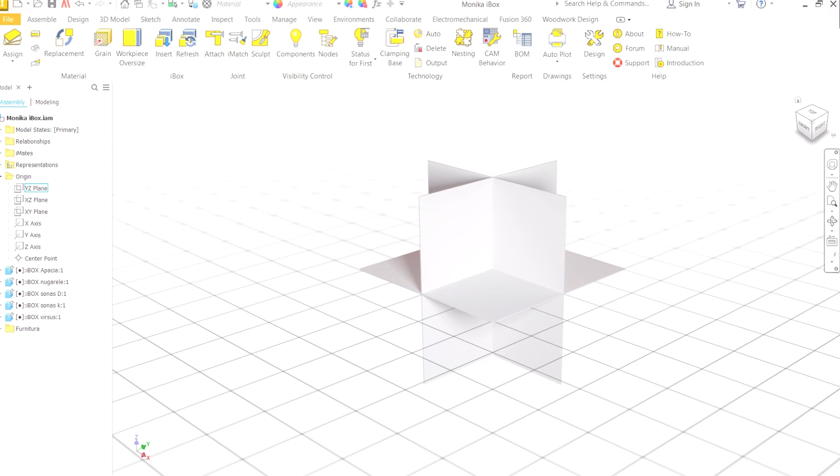The furniture design market is gaining momentum. Design trends are changing fast. New materials, forms, and hardware solutions demand creativity, flexibility, and speed from interior creators. Woodwork for Inventor is a solution that helps furniture design companies stay on top and walk hand in hand with this evolution. Based on Autodesk Inventor, Woodwork for Inventor is built to meet every designer's needs and to strengthen design departments. By automating routine tasks, our software eliminates human errors and shortens time to design.

Woodwork for Inventor is successfully used by more than 600 companies worldwide. There are two main reasons for this success: the technologies are developed one step ahead, based on 30 years of experience in the furniture market, and a wide network of partners that ensures seamless implementation, integration, and support. We have a proven methodology for solving the designer bottleneck, avoiding painful sudden changes, large drops in productivity, and preserving the existing workforce. Our unique know-how allows us to solve the most complex problems, and the API gives us the opportunity to adapt Woodwork for Inventor to any needs. We guide our users step by step through the entire integration process, participating in all stages and providing all the necessary information to achieve your goals.

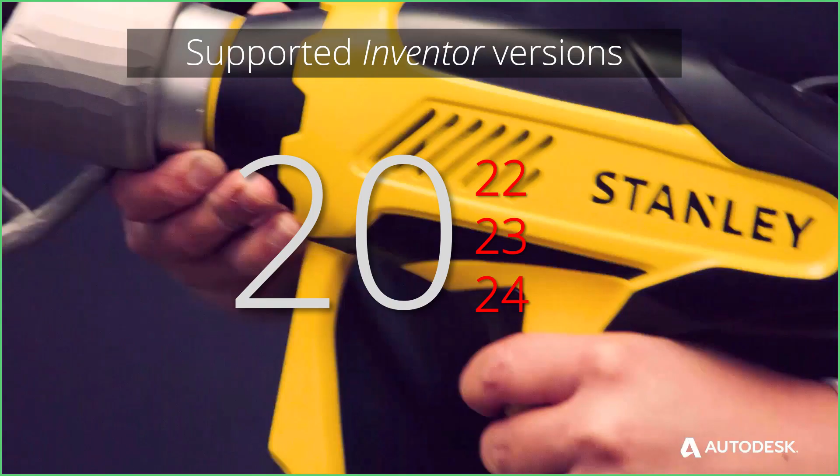Let's begin from supported Autodesk Inventor versions. Of course, we support the newest Autodesk Inventor version 2024, as well as, in the previous cases, two more versions below the current one, which are 2023 and 2022. So that's a good opportunity for upgrade.

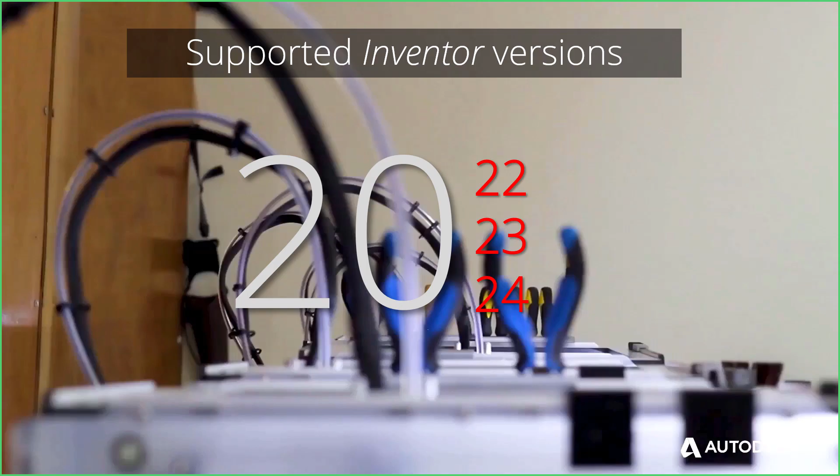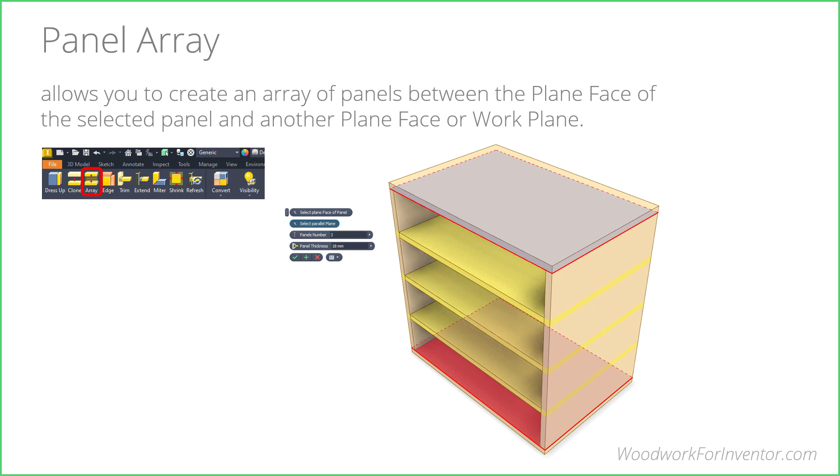Now let's speak about the new features in the different areas of Woodwork, starting with the design environment. In the design department, let's start from the skeleton. We have a new feature called Panel Array, which allows you to create an array of panels, as the name suggests, between two selected faces. You can choose two faces and define how many panels you would like to get. There are different scenarios for that kind of thing.

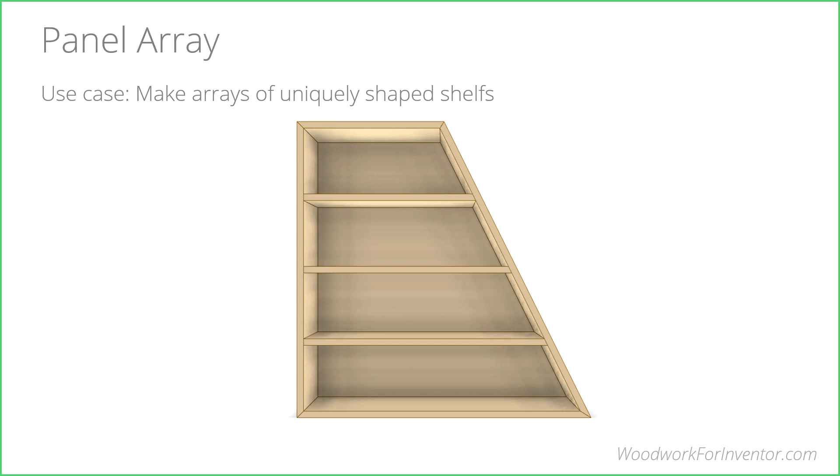For instance, you can make an array of uniquely shaped shelves, like in this example. In order to do this manually, you need to spend some time, but with this new feature, it's a rapid prototyping technology. So let's take a look at how it goes. First, we begin from just a regular sketch. We can design a general shape of this trapeze, define the depth, and then let's take a look at how this new function works.

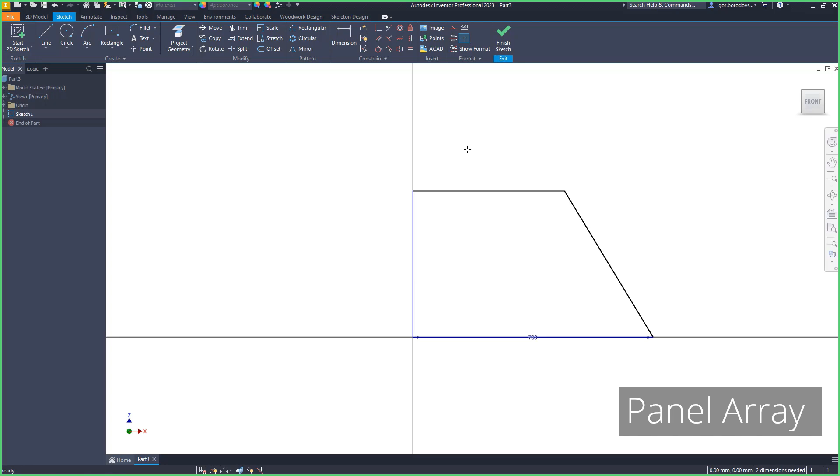Normally we start from a concept, define constraints, then add some dimensions, and just a few minutes after that, that's what we have. So let's set the depth like this.

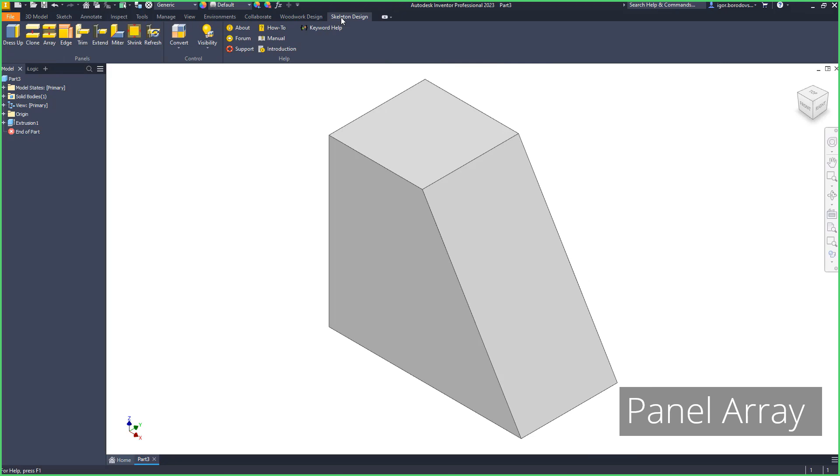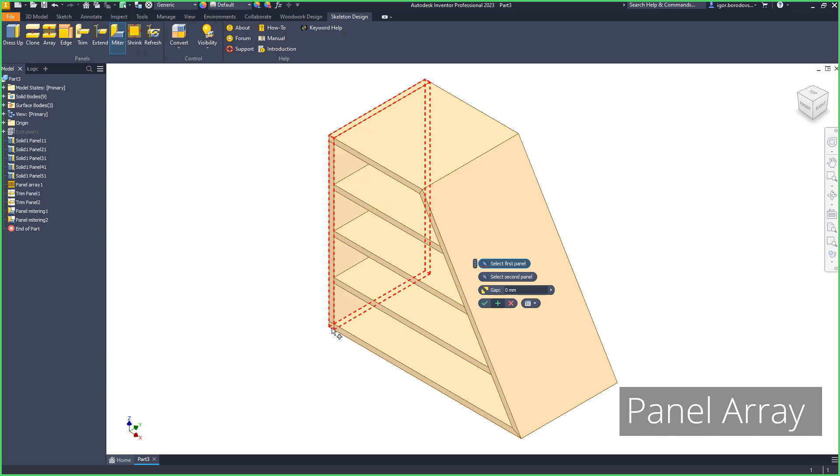Set the panels all around, except the front. Now we can hide some of the volumes that we don't need and use this new panel array feature. As you can see, some of the panels are now overlapping, but we can use the trim function to quickly trim the extending areas, and then use miter to join the panels at the correct angle, and that's it. As you can see, after a few minutes, that's the model we got.

Very nice. Now let's speak about the modified trim command, the command used to actually cut intersecting panels. Now you can specify the gaps between the sides or top and bottom of the selected panel. Moreover, there is a split option which allows you to split a panel in two.

Let's say we have some section in the middle of the furniture and a shelf which goes all the way from left to right. So we can use this divider in the middle to get two shelves instead of one.

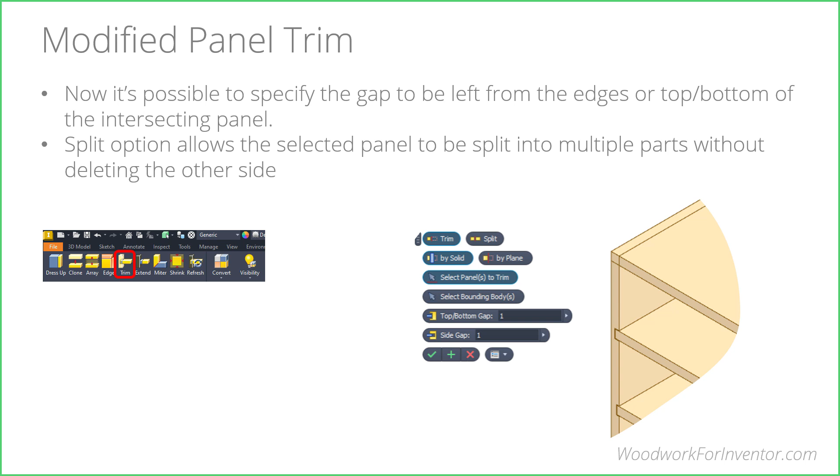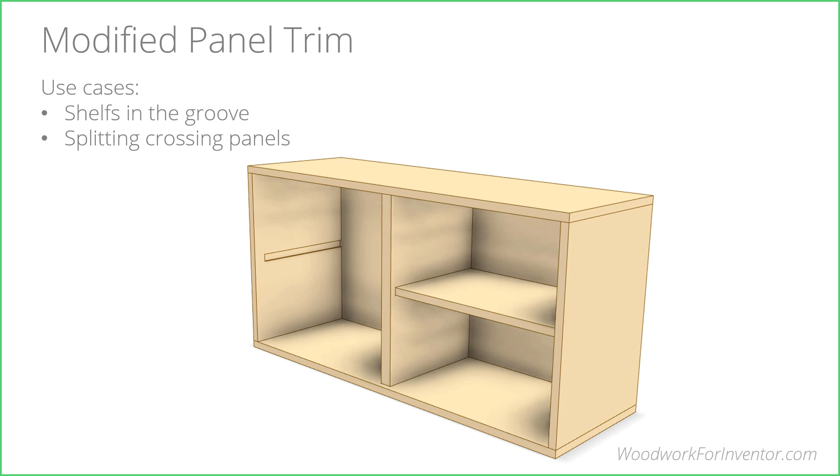So here you can see some examples of what I meant. We have just a case with a vertical divider, and we got a shelf split into two pieces, two halves. Okay, let's take a look at how it happens in real life.

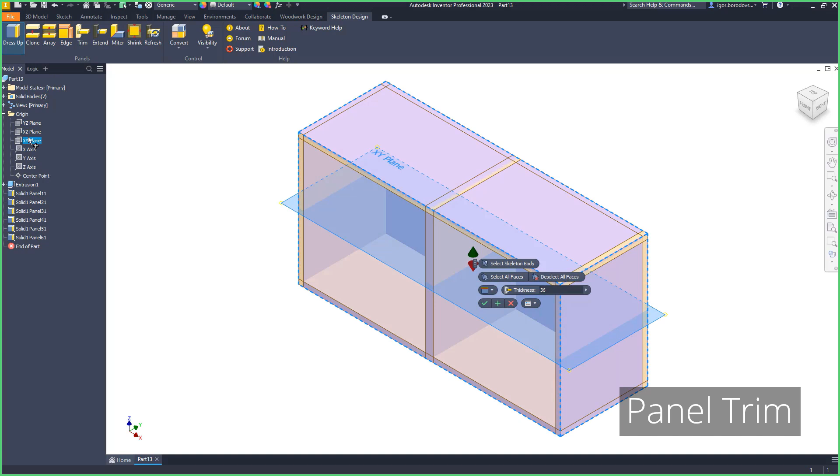As usual, everything starts from the concept. I'll speed up this step a bit since there's nothing interesting in drawing the box. Then we can apply the panels all around, using the plane as a reference, so we can make the panel at the intersection between the plane and the skeleton body.

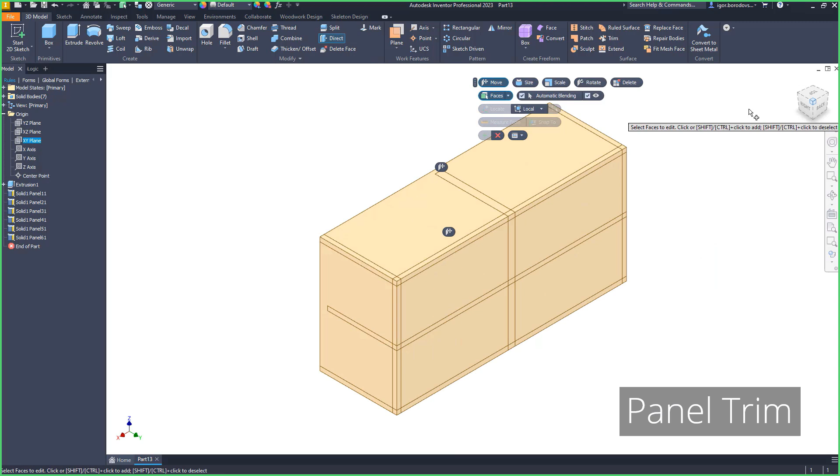Now I can use the direct tool to quickly set some offset from the front. That's it. But as you can see, everything is overlapping now - all the panels are intersecting, so let's deal with that situation.

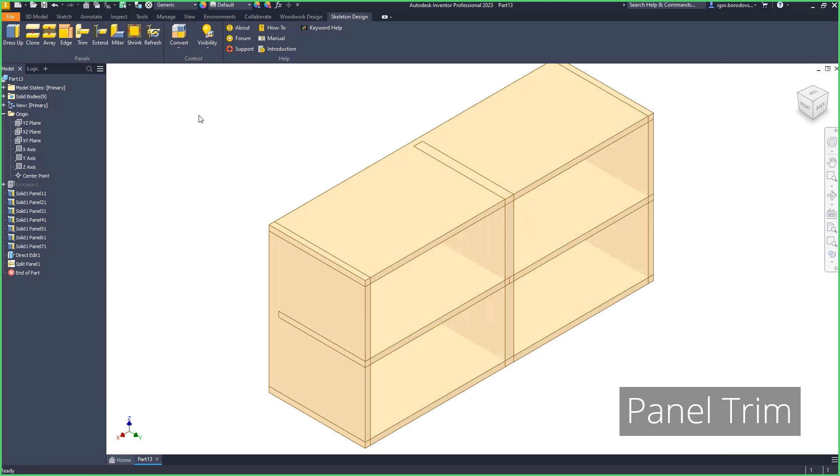I hide the back plate, and now I can use the split command using the plane as a split tool. So that's the work plane, and I got two shelves split by the plane. They are overlapping right now, so let's take a look at what we can do next.

I can trim this divider by the plane again, like this, but not in two equal pieces - instead using a gap value, which can be negative. So you can see this panel going inside by a certain value, like 9 millimeters.

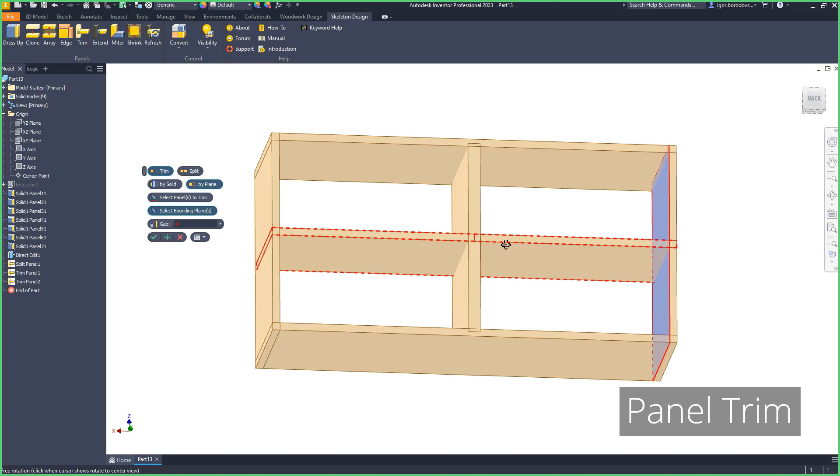We can do the same with the sides, like this, and now those shelves go inside of the vertical panels by a certain value, okay, like this. For now the panels are still overlapping, but we'll deal with that a bit later.

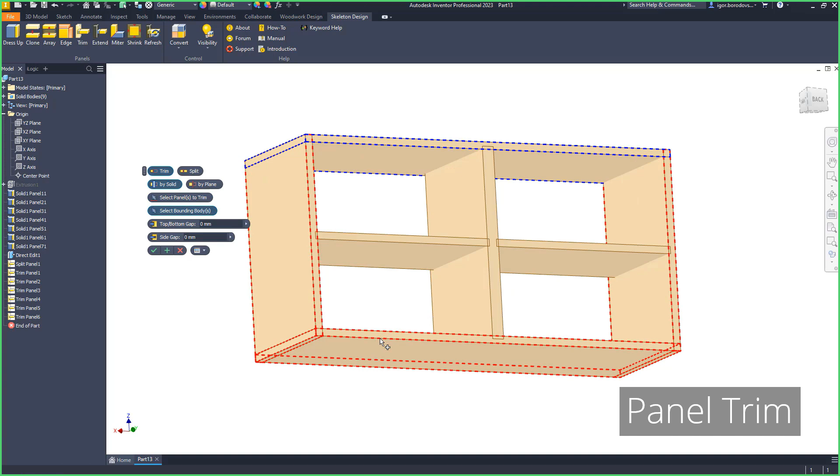Now I can use trim by solid to define the correct join between the top and the side panels, like this, as we normally do. Now let's deal with the shelves and the side.

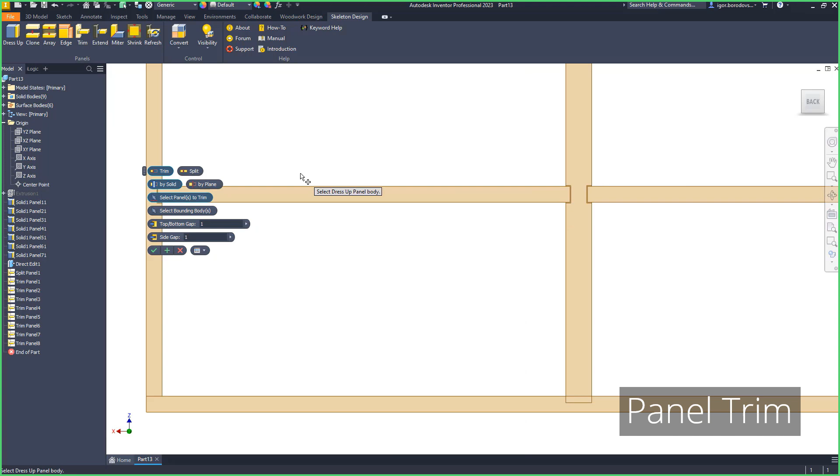I can select vertical panels as the panels to trim, now bounding elements, and here you can see that I can set the gap, like 1 millimeter all around, like this.

Okay, and the same with this vertical divider. So let's choose panels that need to be trimmed, bounding object, set the gaps, and that's it.

And so now we have the front view. We just flip the furniture, and that's the result - we have nice grooves with some gap.

Of course, this gap might be too big in this example, but just to have a clear vision of what happens, I used a slightly bigger distance. As you can see, that's quite complex geometry done in just a few minutes.

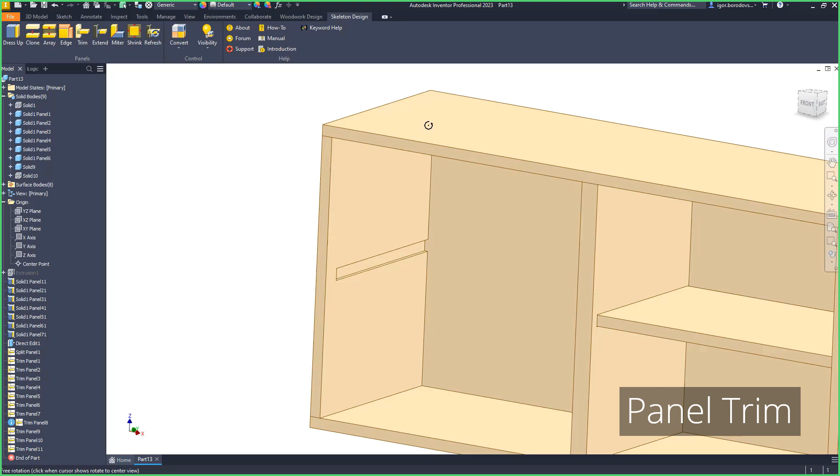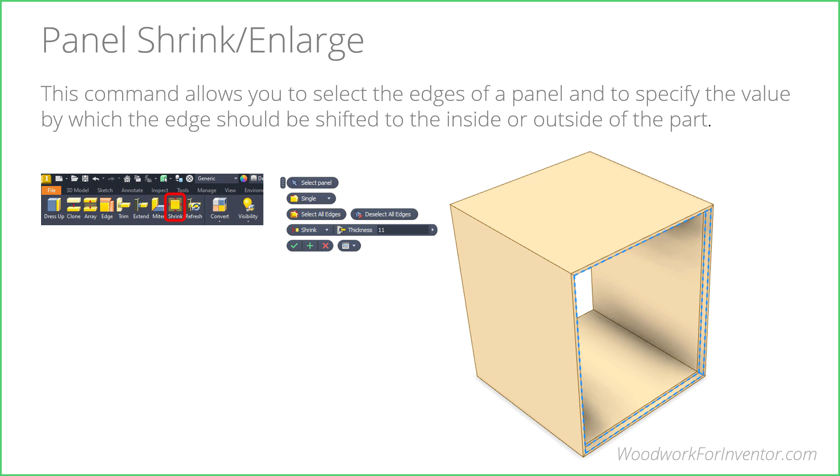Now let's look at another feature: the panel shrink option, which allows you to define different panel offsets. Normally you'd need to make a sketch to shrink the panel and do an extrusion with the intersect option, but in this case you can do it in a single command. The options allow you to select different edges and define different distances to shrink or extend the panel.

What are the typical usage scenarios, like back panels or adjustable shelves? In this example, I had the shelf inserted inside the volume of the box, and then I used the shrink to ensure the front offset as well as the side offsets and the back offset.

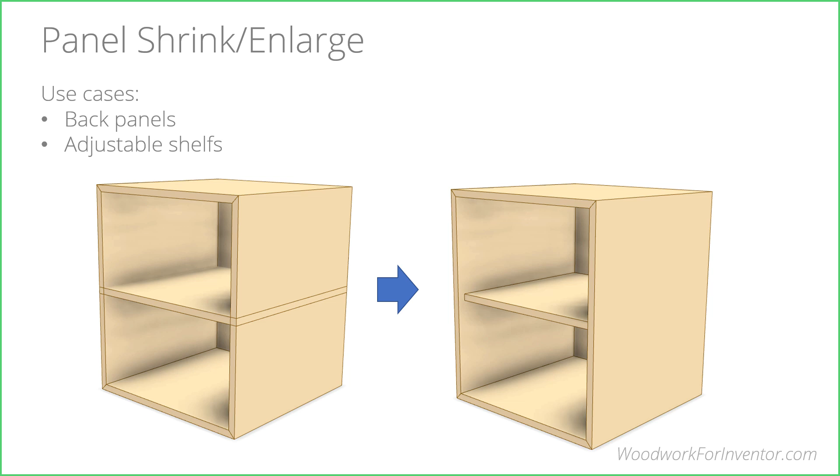Okay, so let's take a look at how it goes. I will not show the initial workflow - let's imagine that we already have some box with the panels.

Then we can just do the miter, and let's take a look at the back panel. I can define the shrink distance like this, and now this panel became smaller.

Now I can use a trim function in order to trim the panels which surround this back plate. And that's it - you can see we have a nice groove, just a few clicks.

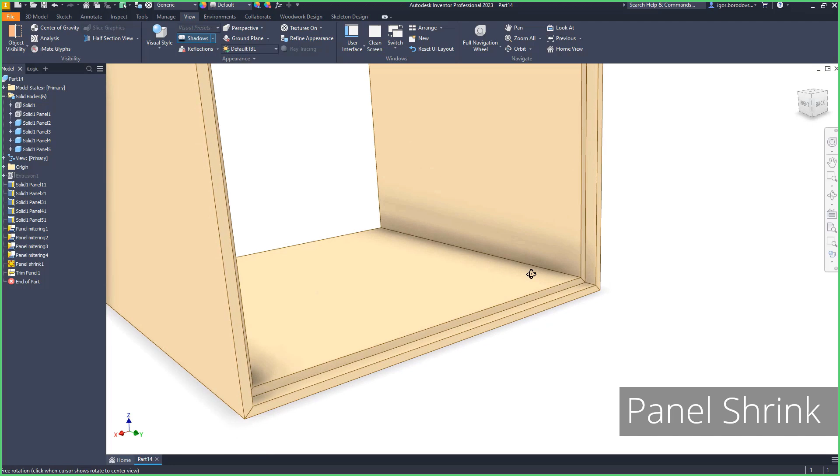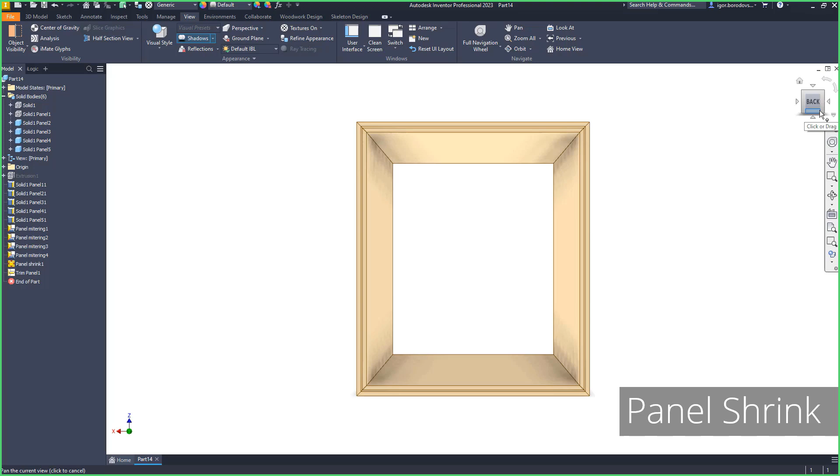Now let's take a look at the Edge Dress Up command, which allows you to create solid bodies around the panel edges.

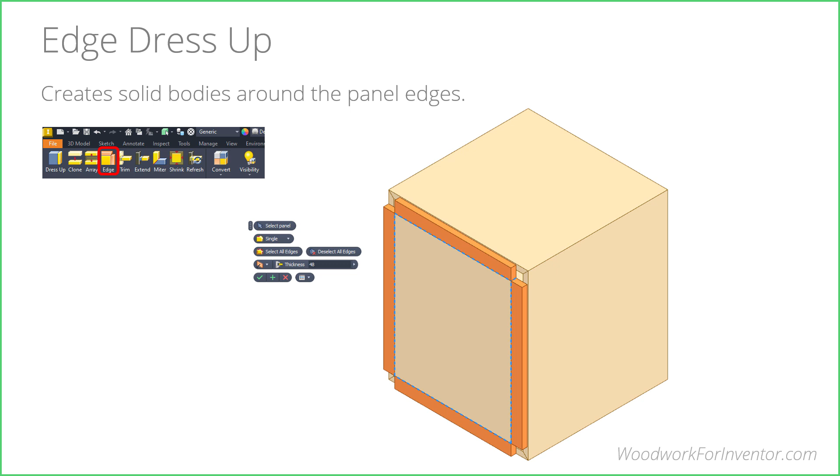Okay, so you can see that those orange panels are solid bodies generated on top of the existing door panel, which of course can be done using the shrink option. First you make the door, then you shrink it down, and then you apply solid bodies around to make it like an inside door, like this type of door. Yeah, there might be different use cases.

For instance, you can use a framing option. You can just have multiple steps in order to get multiple frames all around. Let's take a look at how it goes.

But before that, just one more word about the miter command. As you saw, this command allows you to get a cut between the angle. There was nothing new here, but there's a new feature which allows you to extend the panels before a mitering operation. So you could only do a miter if those panels were overlapping in the previous version. Now it's not necessary—we can do a miter in any case. Even if those panels are not overlapping, we can automatically extend them and then do the miter operation. Let's take a look at how it happens, okay?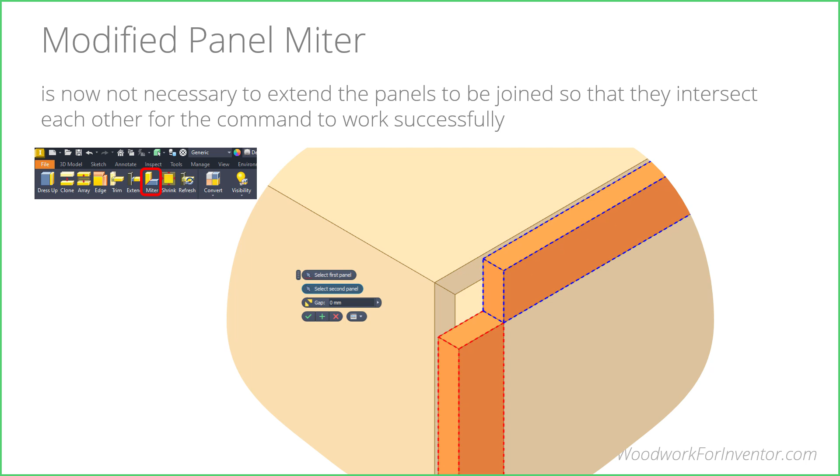The typical scenario of this case can be different kinds of frames, solid wood doors, etc. So, the real case—let's say that's our initial situation, that's the panels. And let's take a look at what we can do.

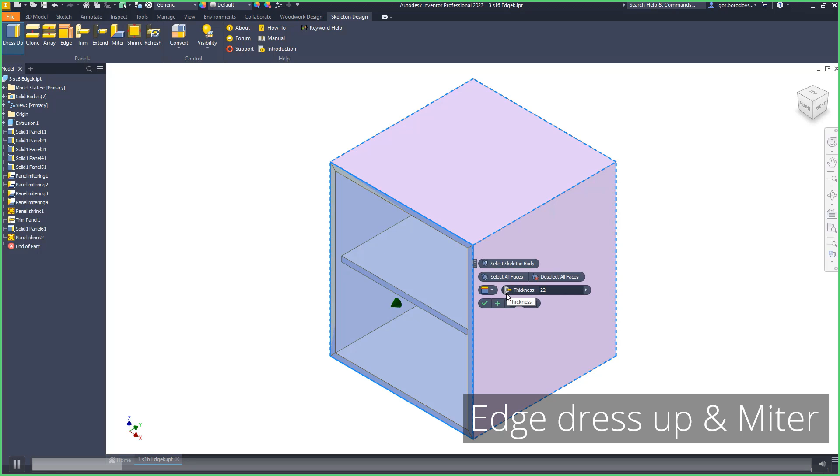Okay, so let's make the dress-up operation, define the thickness of the door. That's it. Now I can use the direct tool to move the solid body of the door a bit aside, because as you remember, there might be a gap of 2 mils between the body and the door.

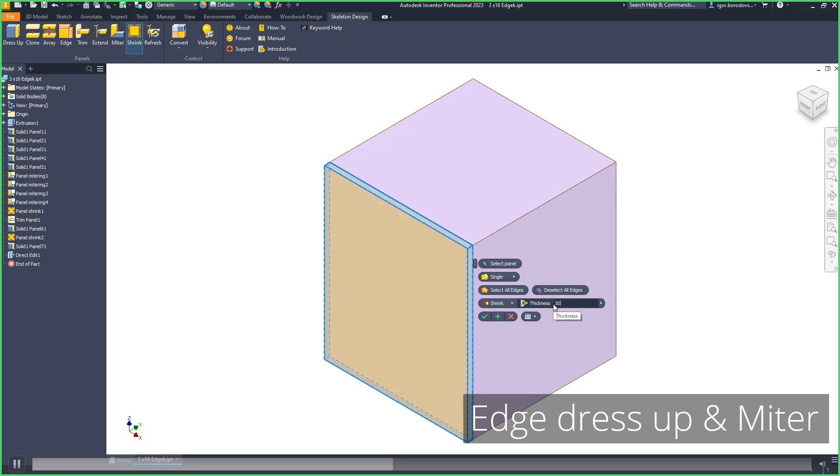Now I can use the shrink command, the one we already saw. I can select all the edges, define the offset value—let's take it bigger because we want to apply solid pieces all around. Now I can use the edge generation command and define a bit smaller value because I need to have side gaps. Imagine that we can have multiple cabinets standing side by side, so I want to ensure the clearance.

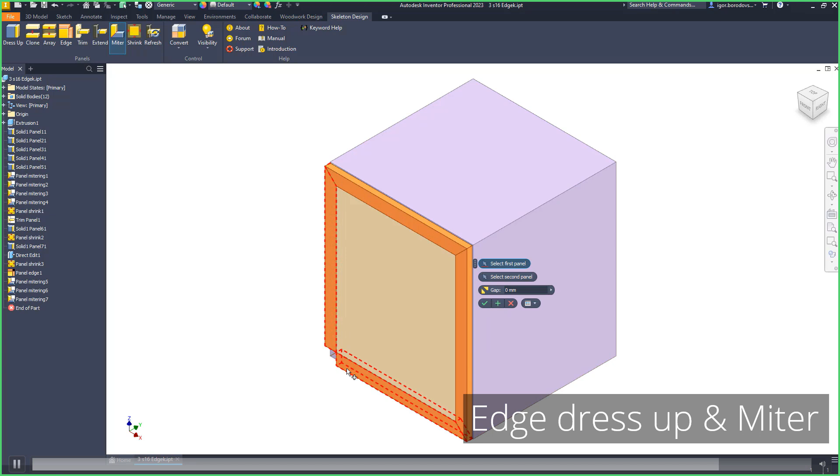And then let's use the miter, which allows you to automatically extend the panels and actually make the miter. As you can see, there's the gap option that can be used for different purposes. Okay, so that's basically it—as you can see, we got the framing.

Okay, now let's take a look at the interface. We have some new interface workflows. For instance, when you do body conversion and visibility control, you can actually do this in a drop-down menu. You can say what you'd like to do with the object—hide all the skeletons or maybe all the panels—in just a few clicks. You don't need to actually set the type and so on. You can select the item from the drop-down, and the operation menu will automatically inherit the option you selected, and you just need to pick the object that you want to convert or hide.

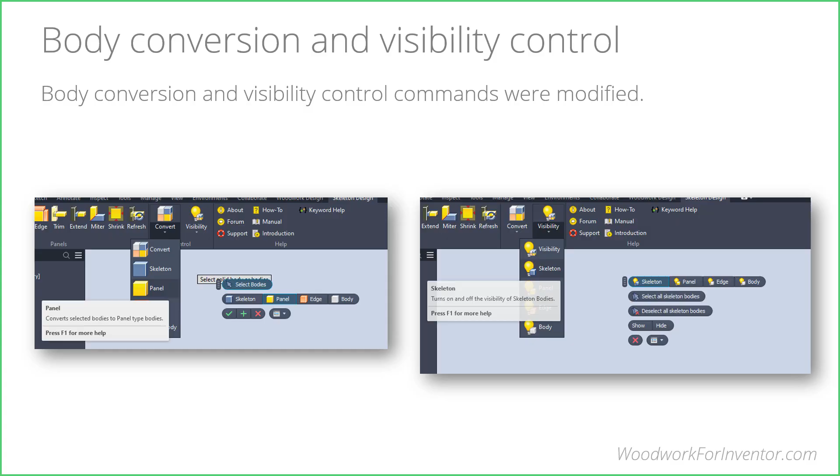Now let's speak about the hardware. That's one of the main improvements.

First of all, we built a new smart hardware mechanism, and later I'll explain what this means. During the insertion of the hardware, we need to recognize if it's old hardware or the new one. The smart hardware recognition mechanism automatically recognizes hardware made in this new way and applies certain rules to make the join correctly.

So from the user's perspective, nothing changes in terms of usage of legacy hardware, but when you use the new one, it works a little bit differently. We'll see how it performs, but it's very clear—there's no user interaction needed. You just pick the hardware you want to use, and the system automatically recognizes if it's done in the old way or the new fashion, and applies the appropriate workflow to insert it.

So now let's take a look at what this new smart hardware actually is. In simple words, it's a set of components made with some logic inside, and it controls how those components need to be connected.

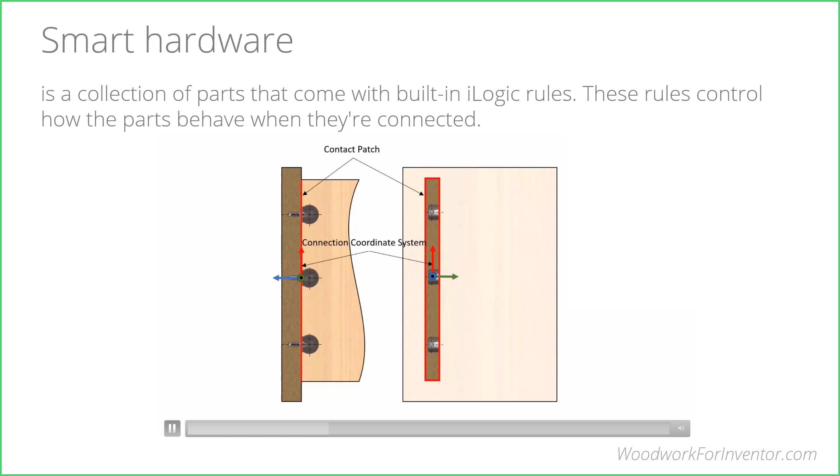In the background, what we do is calculate the contact patch, so we can estimate the surface area. In the logic of the hardware item, we can define the offset. So we can say the first component should be set at some distance from the top, the last one at some distance from the bottom, and there should be one more in the middle. Using this logic, we can program our set of hardware items, build some logic inside, and actually place multiple instances of the hardware in the correct places in a very short time. Later we will see how this happens.

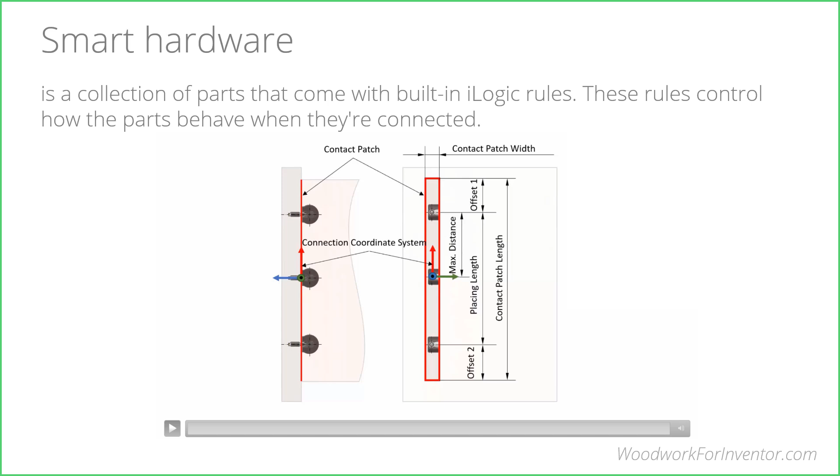On top of that, hardware items can have macros. This isn't a completely new feature, but just to refresh your knowledge, some hardware requires multiple steps in order to be positioned. Say, for instance, you do a milling operation, then drilling, maybe drilling from the other side. This requires multiple steps done in a certain order, with certain tools, to make a void for certain hardware. So you can make macros, which are not limited to 2.5 axes—it can use however many axes you'd like. What we do is just pass the coordinates in a macro with the actual code of the program, running some application at a certain position from the edge.

So how does this relate to the new smart hardware? Those hardware elements you design can also have macros inside. Not only do you place multiple elements in a single operation very quickly, with no more work planes needed—everything can be guided by embedded logic—but also those hardware items can be quite complex, with multiple steps needed for actually placing the elements.

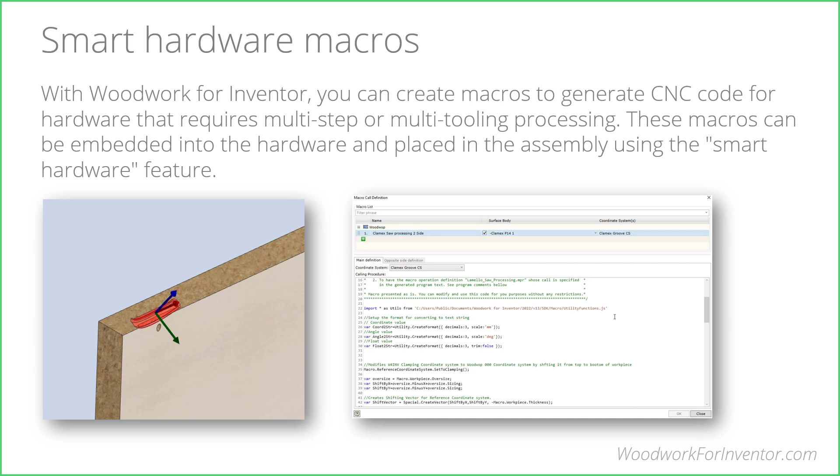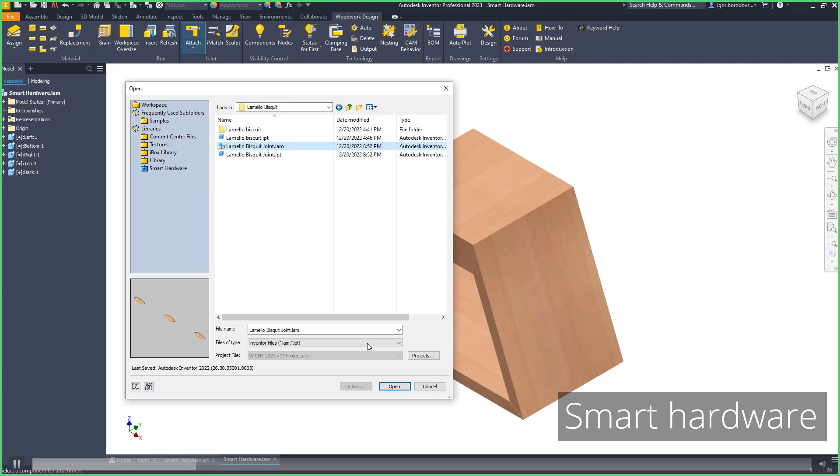Okay, so now let's finally take a look at this command in a real case. You can see it's quite an unusual shape. We will place the hardware elements using the regular attach command. So now we navigate to the new smart hardware folder and choose the Lamello joint, and what I need to do is just select the items that need to be connected.

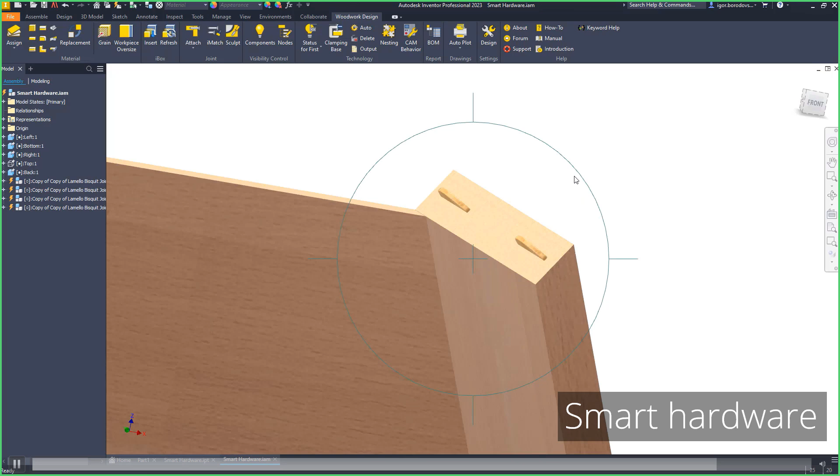Now the calculation happens in the background—we actually calculate the intersection area, and we decide how many of the lamellas must be inserted. That's the magic, that's the trick. As you can see, there's no need to make a work plane, no need to make additional geometry. Moreover, you can embed different scenarios inside your hardware set, and just work it out with different joint types and so on.

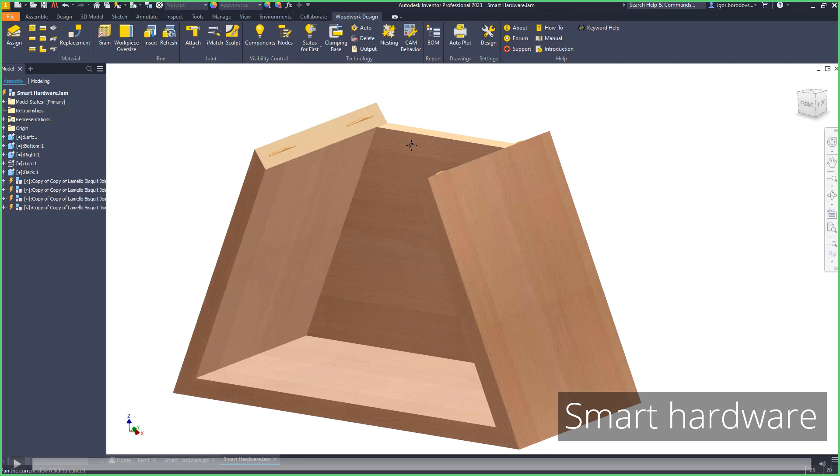Okay, now let's move to the BOM, the bill of materials. We included some keywords, like for instance CoverWorkpiece.X.order, which allows you to define the order in which the cover will be applied. This is useful when you work with expensive materials, or maybe not a regular edge band but thin metal plates and so on—in this case, the order can be critical. So Woodwork allows you to get this order.

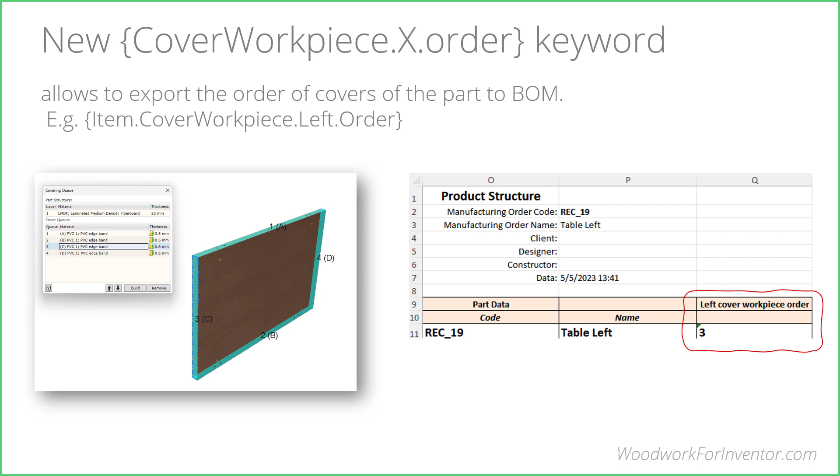And speaking about keywords, there are multiple keywords in the new version—some of them just reword legacy keywords, some are new. That's why we have a keyword help, which allows you to get the definition of the keyword in an easy to understand form, with an example and the format definition. You can use those keywords to shape the output data, so for instance you can make the bill of material tailored to your needs.

So the next topic is materials. In the material command, the first thing you'll see is the newly refined material assignment window, and there's probably no need to explain the difference. But if you didn't notice, there are no more drop-downs—in most cases there's some drop-down for a certain material cover option, but nonetheless there are no drop-downs, which means there are way less clicks. You can just directly say what type of material you'd like to assign and what the option of this material assignment is. On top of that, you can also see the thickness of the cover material you are applying.

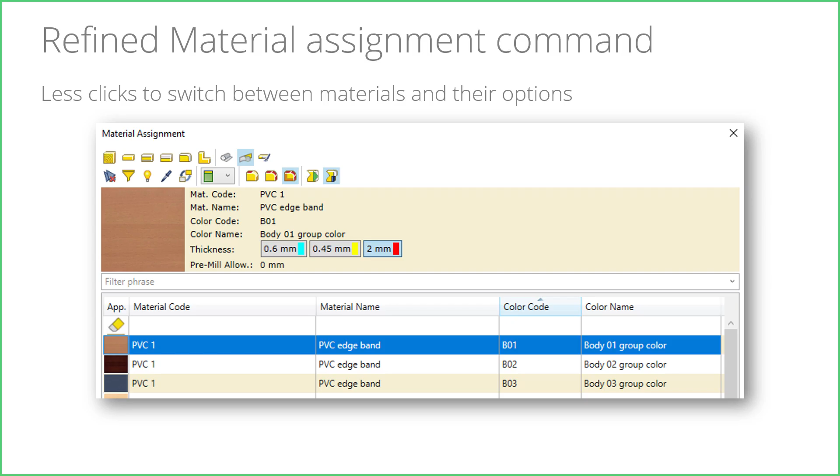Okay, let's move to the next topic—this will be CNC.

Okay, so one of the new features is an option to export CAM technology into BOM.

So how it goes: in the first step, you prepare a Woodwork technology as you normally do in a regular case. Then in the Woodwork BOM, you can actually use a certain XML template for a BOM export, and this BOM template can get the technology of Woodwork. Let's take a look at what the BOM does.

It generates some output file, like a text file. So what we do is request the Woodwork BOM to take the technology from Woodwork parts and provide some document, and this document can be in XML format. This file is built from CNC technologies within the parts of Woodwork, and this XML document can be imported into supported apps. That's how it goes.

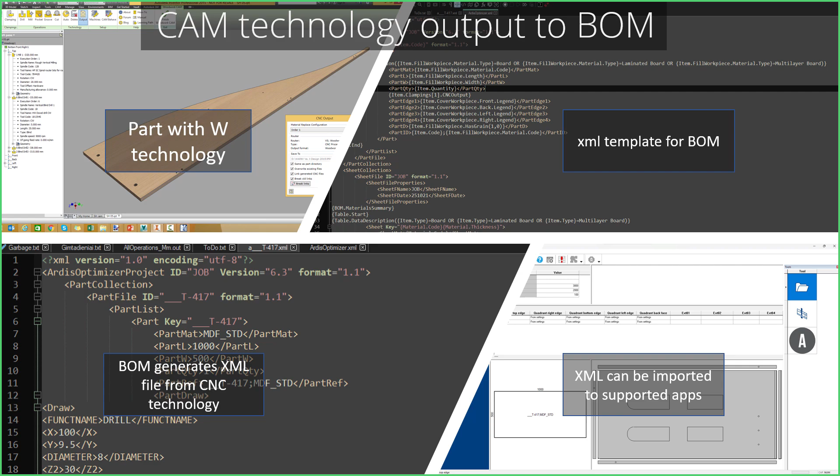Okay, so there are minor post-processor improvements under the hood. It's quite hard to explain what was actually done here and there in different post-processors. But there is one important thing: there is an option which allows you to build your own custom post-processor. We'll speak about this a little bit further.

Okay, so when we do CNC, there is an option near the mill command that allows you to chip the area. Why do we actually need to make the chip during the mill? In most cases, when you do a milling of some contour, let's say a cutout for a kitchen sink, you just go around the contour and the remaining piece just falls out onto the machine. Depending on the structure of the machine, this can be potentially dangerous.

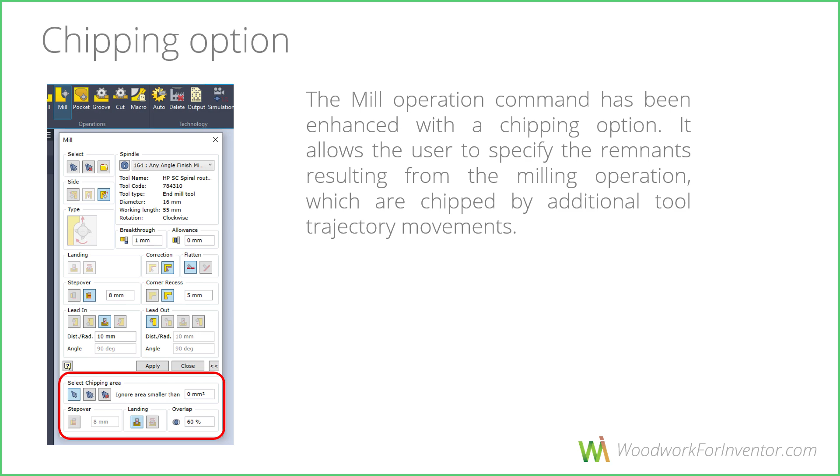So say if you have vertically mounted plates or panels, it's not good if this big piece of panel just falls somewhere. So what you can do is chip this panel. You can go around the contour starting from the center, actually turning the panel into dust. Let's take a look at how it happens in a real case.

So that's the milling operation. And that was the option to actually chip the panel.

As you can see now, the router moves the milling tool starting from the center and moving towards the perimeter. In such a way, you just basically get a lot of chopped wood, and that's it. You have no damage to the vertical machine, or maybe some certain kind of machines that don't like when a big piece of wood just falls off somewhere inside the machine.

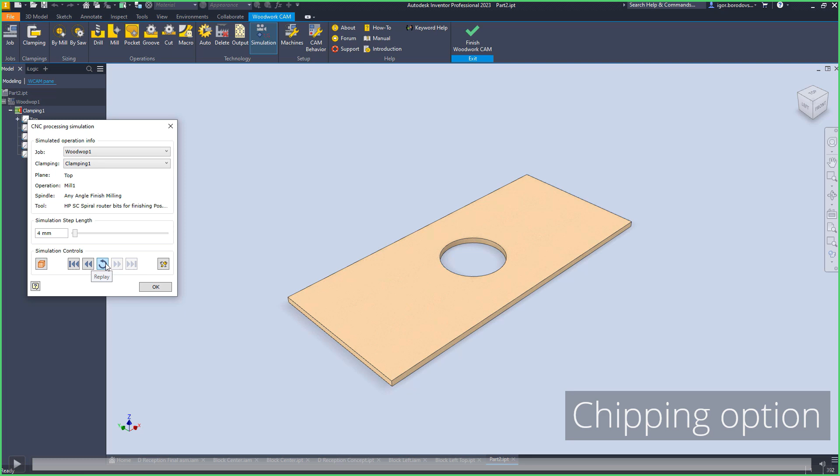Okay, so now let's take a look at the nesting, the optimal layout. In some cases you need to actually simulate what happens in the nesting, and we got you covered in this version. So now you can run the processing simulation on the nesting.

The nesting is not the same as just a regular CNC, because there are certain rules and restrictions that apply. For instance, you cannot access the side operations; you basically do only the top operations. And since you do this with the rotary tool, which cannot make sharp internal angles in some cases, you need to check what will actually happen during the nesting. Maybe you need further processing on the CNC machine, maybe not.

As you can see, there is a nesting environment, and you can use right-click in order to simulate the processing - that's the last option in this drop-down. You can do this on the sheet basis: select the worksheet you want to simulate, and it will show you the result.

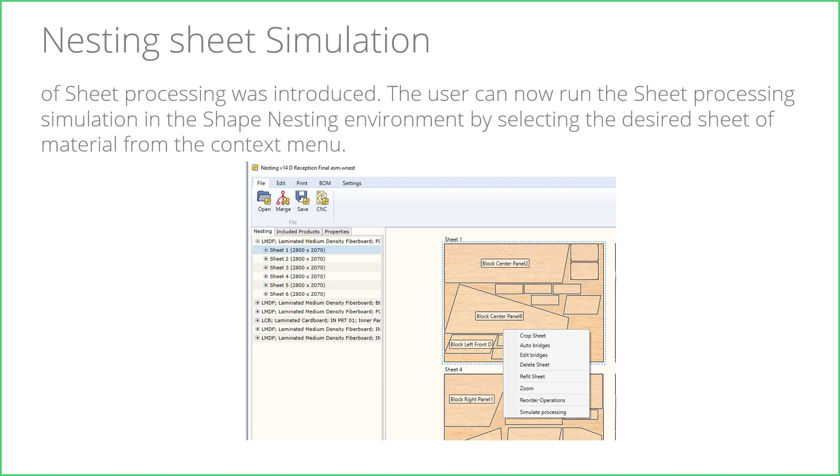Okay, let's take a look at how it happened. So that's the nesting layout, and let's see what can be done. I can choose the simulate option, and that's it - that's the operations that go on this worksheet, and you can compare it with what you expect to see. And if those results are correct, that's it.

So we can just run this program in a real scenario. Okay, so speaking about the nesting and the CNC processing, the critical place is taken by the contours, by the contour processing.

Because what matters in machining is passing the right contour to the machine and selecting the right tool. For some machines there are legacy or special workflows usually used for certain contours, and those contours are typically applied on the pocket operation.

The CNC machine wants to use its proprietary mechanisms to get things done the right way. So here we have an option to save the original contour, not just an offset contour, but the original contour as well. In this example, not just those red lines but this blue contour too. The machine itself can then decide whether to use our software path or calculate its own path.

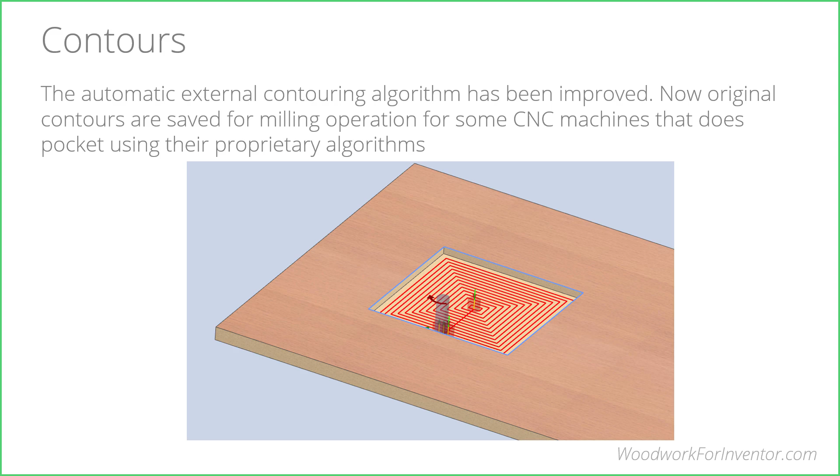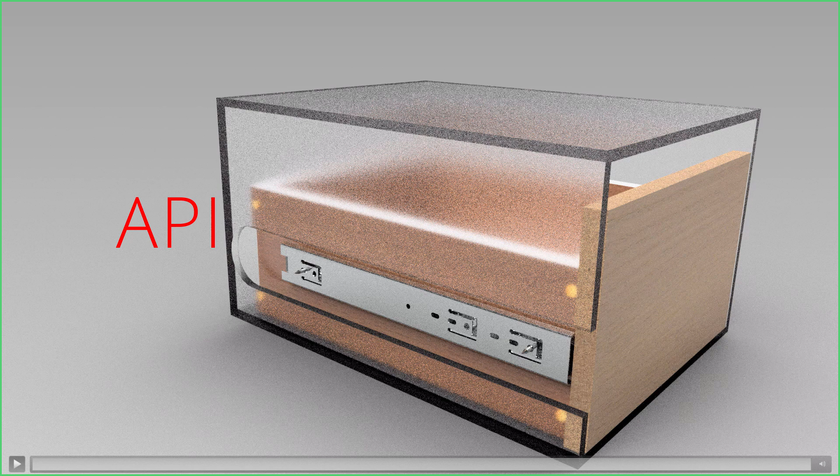Okay, let's move to the next topic: the API, Application Programming Interface. We have included multiple APIs to make Woodwork more tailored to customer needs. Some customers already try to program some functionality, maybe extending existing Woodwork features, and there are different scenarios for why they might need to use an API. Let's take a look at what APIs we have.

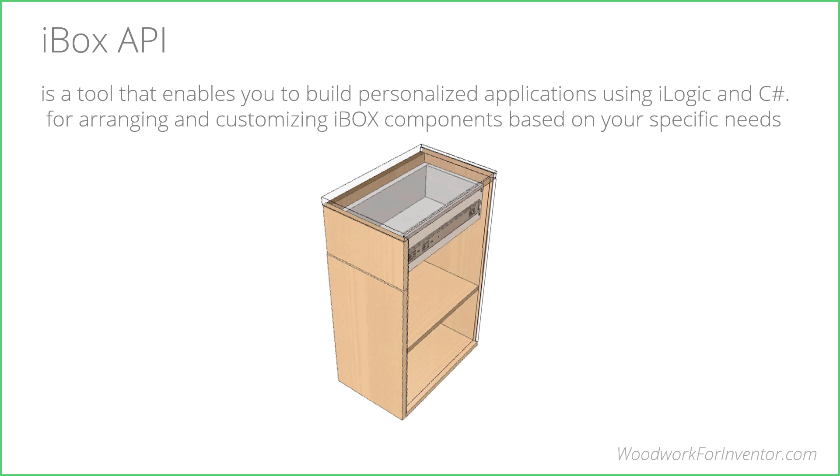The first one is the iBox API. This allows you to make your own personalized application using iLogic or C# for arranging and customizing iBox components based on your specific needs. Let's take a look at an example, since it will be easier to understand.

We start from a simple cabinet prototype and want to control its dimensions, change the amount of drawers, change the height, and so on. When we run the form, as you can see, there are different options available.

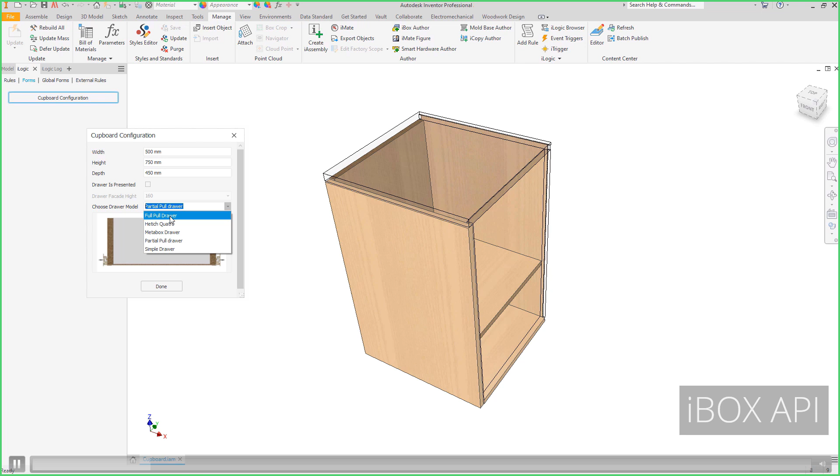We can say whether we want a drawer or not, like this, and the system automatically updates the structure, places the iBox element, and does all this refresh operation in the background, since we need to calculate the size of the iBox item. So when we change the parameters, the iBox automatically adapts to those changes, like this.

We can control the height, the depth, and other criteria of the cabinet, and in the background everything rebuilds. There is a trigger mechanism that determines if an update of the iBox is needed.

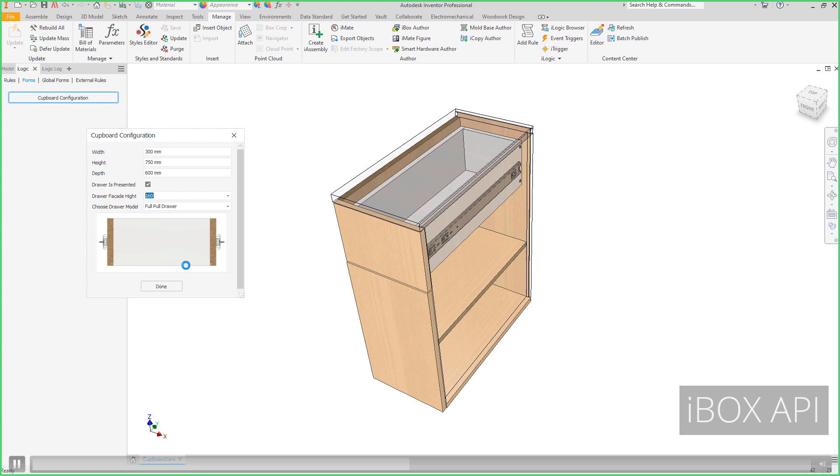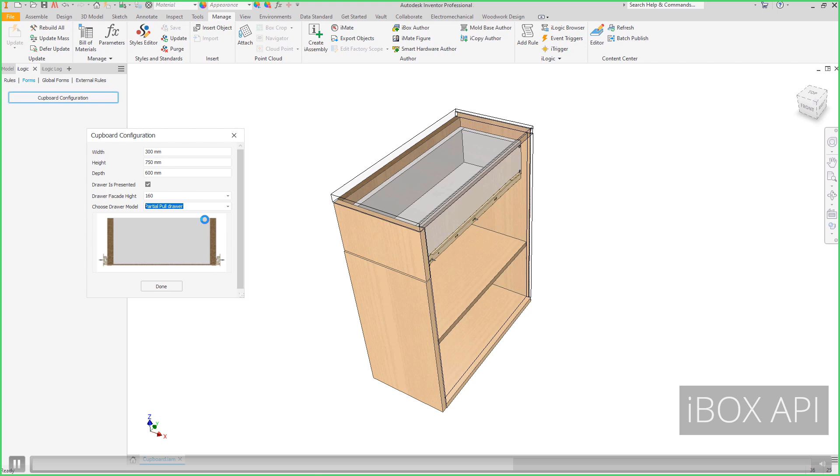In the iLogic form you choose the configuration you want to use, and the update happens automatically. You can choose different types of elements, different types of iBoxes—in this case different kinds of drawers—and the system automatically responds to those changes. You can see different kinds of drawers, different sliders, different rules, and that's basically it.

Now let's take a look at the material API. When we work with materials there are different steps, starting with the material assignment. Speaking of material assignment, the API allows you to define your own material assignment method, and if you like, you can even design your own custom application to do this.

Potential usage scenarios include different configurators—say you have a standard range of products and want different facades, we've got you covered. One important subtlety is that we allow you not only to change the material, like one laminated panel to another, but to change the material type entirely. So instead of a laminated board, you could get an HDF panel, a high density fiber board covered by veneer, and the bond structure will change accordingly.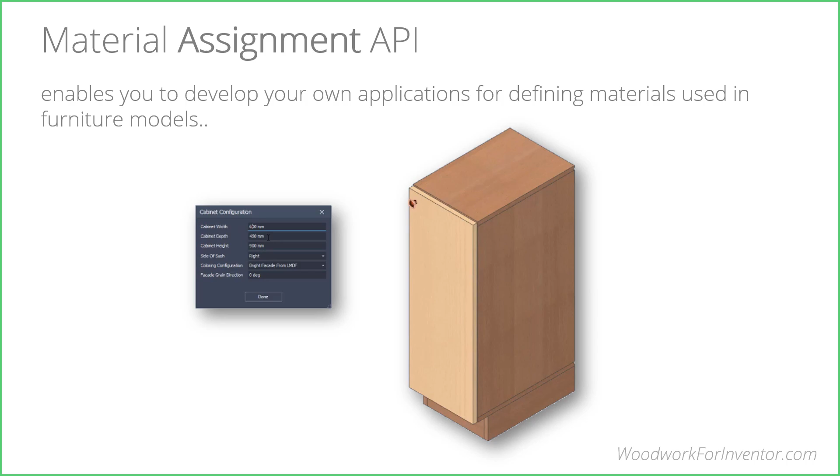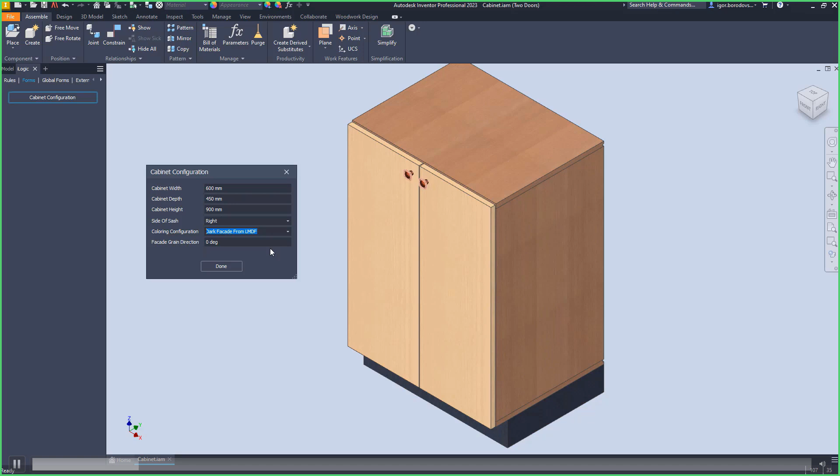Let's take a look at the example. We can change the size of the cabinet, and according to the rules, maybe we want to add another door. That's the point when we start to change the color configuration, so we can change the facades, for instance, in this example.

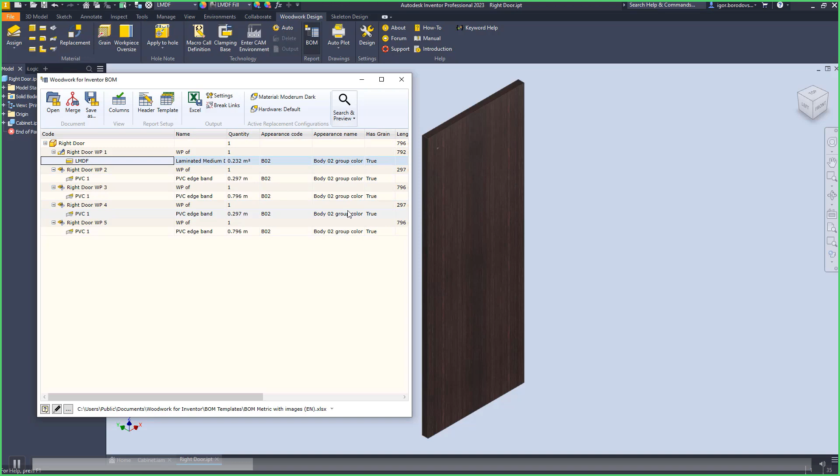Let's take a look at the BOM, because it's not only about the material color, it's mostly about the BOM. Here you can see we have LMDF and four PVC edge bands all around. So let's just remember the structure: four PVCs and one main panel.

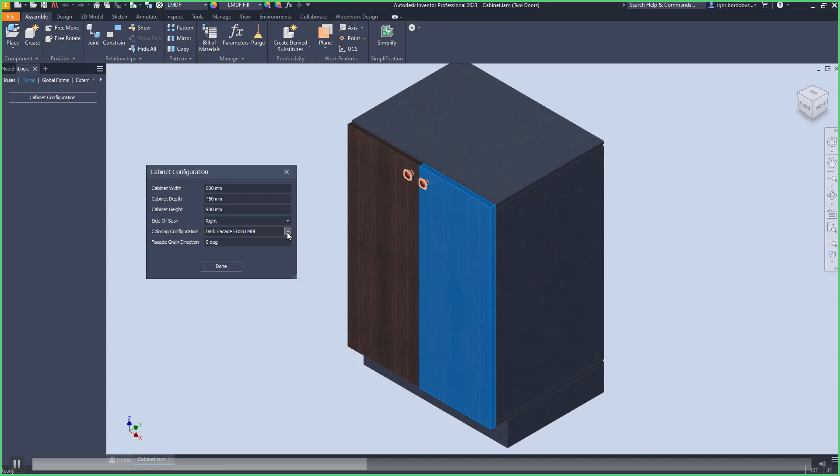Okay, let's close it down. Go back to main assembly and change the structure.

So in this case, instead of using a laminated panel, we can choose a veneer panel. Now let's open this standalone piece. Go to the BOM, and what we see, there is no more 4 pieces, there are 6 pieces of veneer, because we have front and back parts as well.

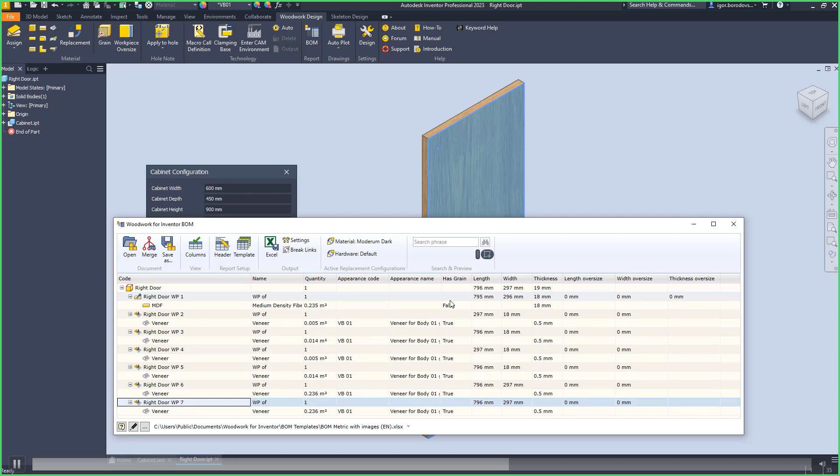So the API allows you to not only change one color to another, but it allows you to also change the type. Moreover, you can also change the grain direction.

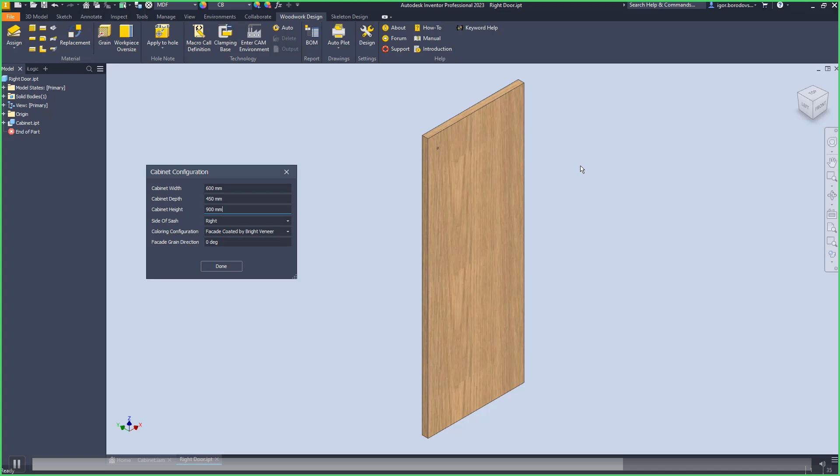Just go back to the main assembly. It was not the correct place to do this. Let's do this on the main assembly, like this. Okay, and the grain direction changed.

So now if you take a look at the BOM, of course, those length and width values will be different. We just swap the length and the width, because the length of the workpiece is calculated along the grain direction. So if you change the grain direction, it automatically changes.

So you can see the first line says that the length is 796 millimeters, but this is the length of the final board. The next line, right door workpiece 1, is the actual length of the workpiece. So the size of the final part is calculated by the longest edge.

But the size of the workpiece, as you can see, the length is a smaller value than the width, because we calculate the length along the grain direction. And when we cut the workpiece out, we just measure the final part by the longest dimension and treat it as a length. But before that, we measure the length along the grain direction.

Of course, if you want, we have an override option which allows you to choose if you want to follow this rule, or if you want to always go along the longest edge to treat this as the length value.

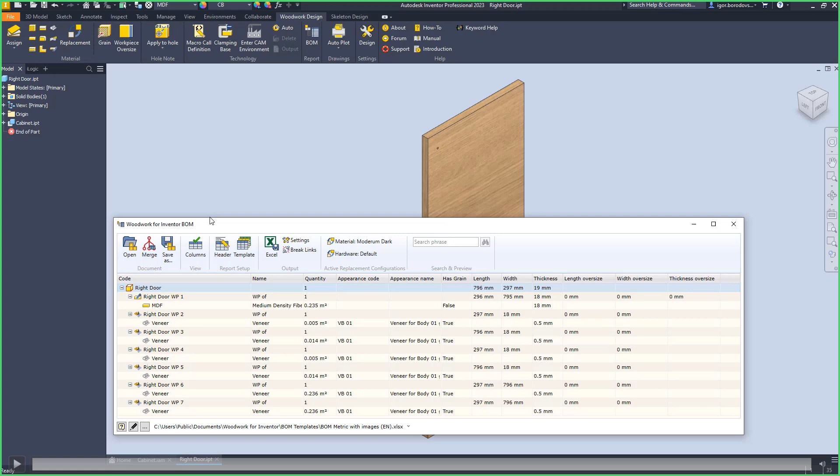Now let's speak about the material replacement API. We spoke about the material assignment, now let's speak about the material replacement. So what does material replacement allow you to do? It allows you to map the model data with some external database using your custom application.

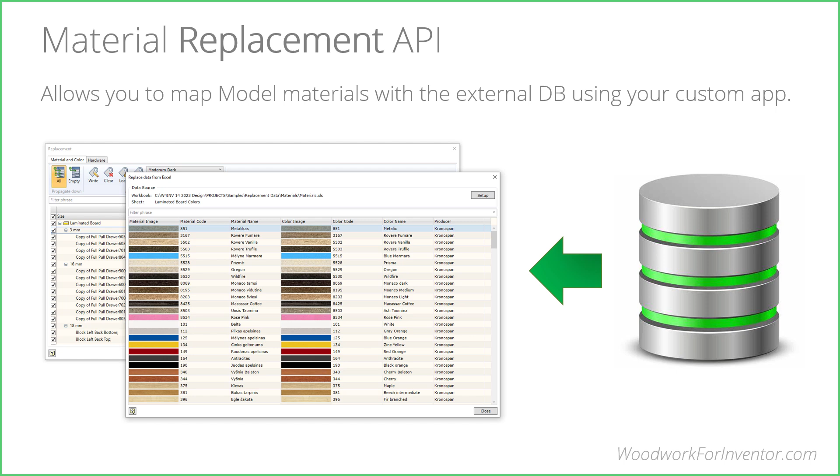And what it allows you to do in the workflow is actually have all those materials you may request from your supplier in a few clicks. And when you set those materials from your enterprise resource planning system, the model refreshes the appearance and looks as it should. So that is an example made by one of our clients.

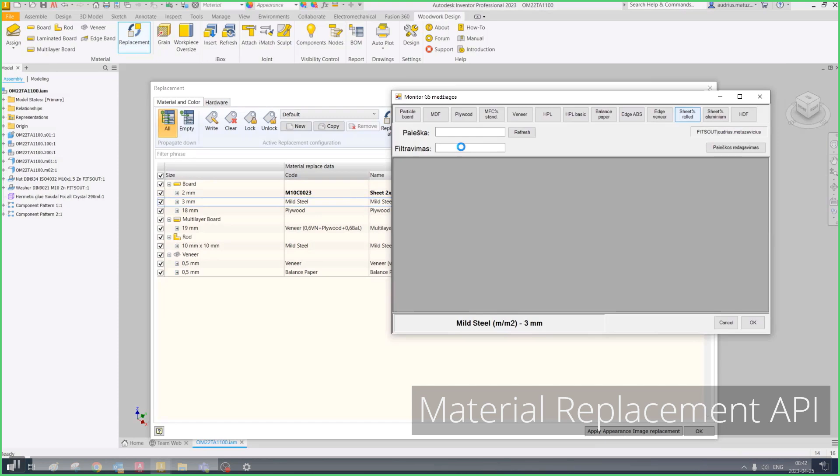They use the ERP system called Monitor, which allows you to retrieve material names and codes. Once the modeling stage is complete, the user can request material data from the ERP system, and information from the ERP system will be combined with the model dimensions. In such a way you get both correct codes, names, and the correct amount of material.

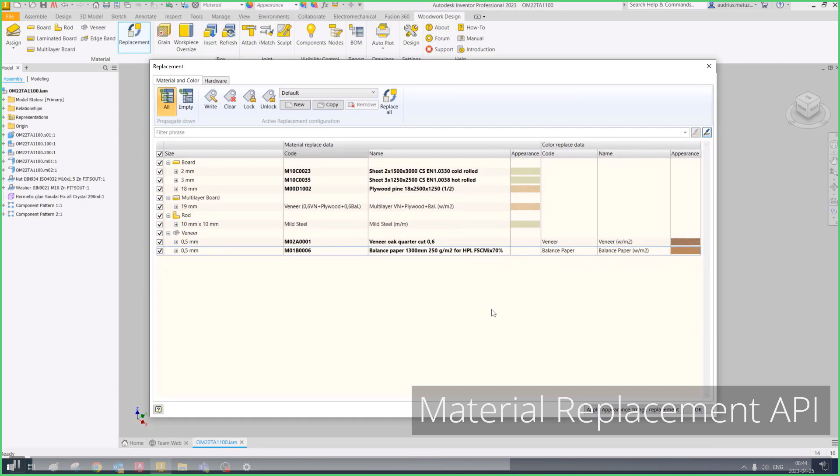So as you can see, we just filter the material by the name or code. And there are custom-made tabs that allow you to choose material type. Okay, so that's it, that's the model.

We can actually generate the final report based on that newly refreshed material set. So if you expand the materials, they will get new codes and names, say oak or pine or balance paper or whatever else.

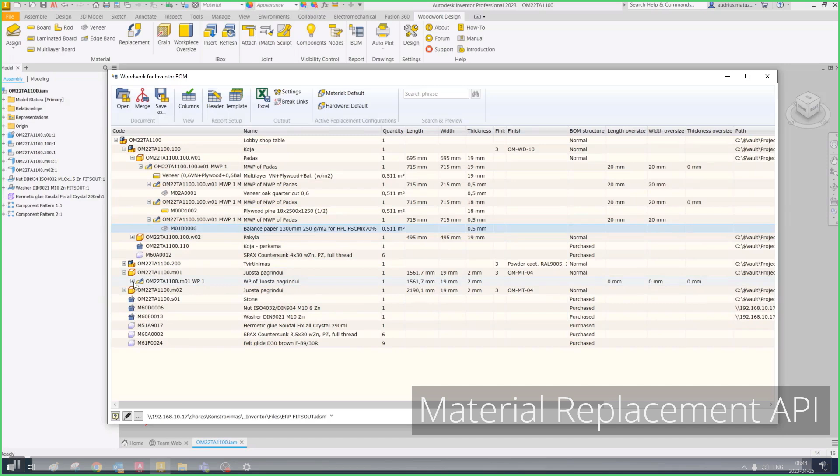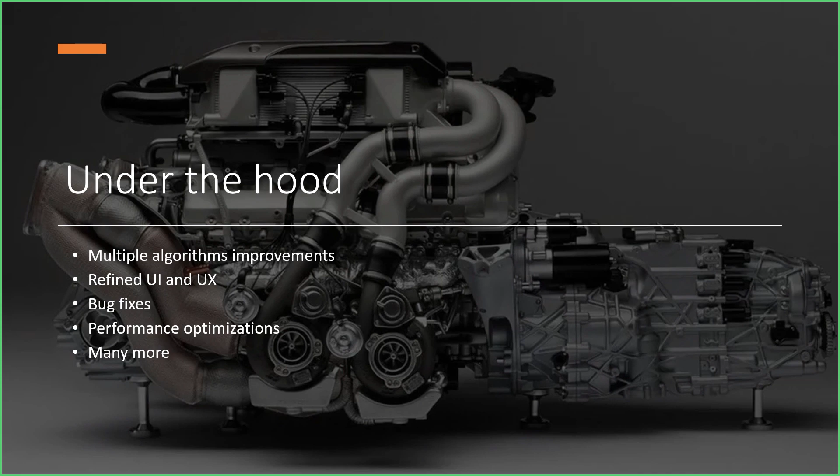Okay, let's speak about other things. There are a lot of new features under the hood which aren't visible by a naked eye, and you need to compare the pieces of code to understand what is going on. So we worked hard on algorithm improvements, refined UX and UI in many places with some major tweaks. Of course, we worked on bugs, tried to eliminate as many as possible, worked on performance optimization, and many more. So that's the main features of Woodwork for Inventor version 14.